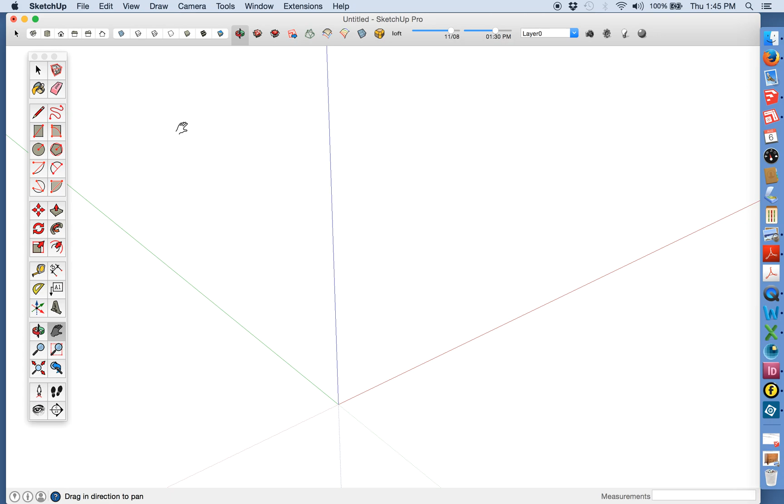Hello, my name's David Heim, and today I'm going to show you how to begin a SketchUp model by tracing over a photograph. It's a technique called photo match. I'm going to be using the image of this shaker blanket chest, and it's a good example of the kind of photo you need to make photo match work properly.

It's taken from roughly a 3/4 view, so you can see two sides. And it hasn't been cropped or resized in any way. If you work with something like an image from a magazine or a book, chances are it's cropped, and the vanishing points for the perspective probably won't work properly.

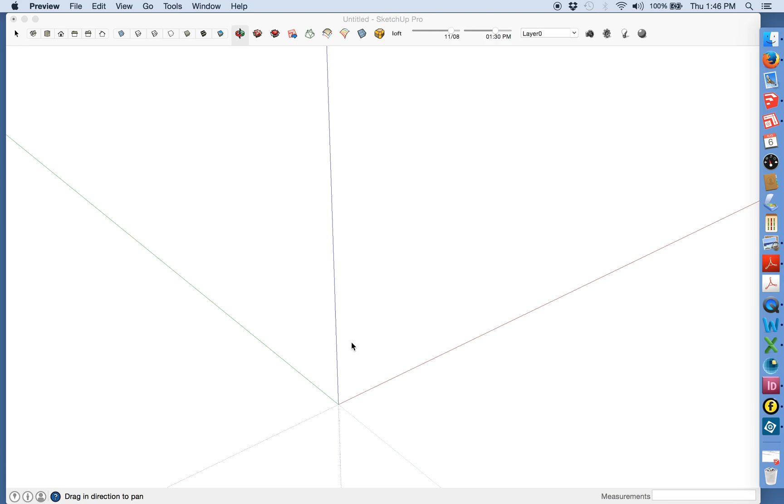So we've got a new SketchUp screen here, and the way to begin is by going to the File menu and Import. We'll choose the image we want, and down here make sure that you've chosen Use as New Matched Photo, not a texture, not an image. New Matched Photo, click Import.

And as you can see, that brings in the photograph along with a whole bunch of lines that can be very confusing at first. Most of them you can ignore. First thing you do, though, is take these dashed lines, grab them with your mouse or your trackpad, and just position them over very strong lines or edges in the photo. And here I'm making sure that I get the little red and green handles overlapping.

You can see that once you place one of these lines, all the other lines start to move. This is because what we're doing first is positioning the vanishing points for this perspective view. I'll just get one right across here at the top, and this is our final one. Get it over my little green line and then stretch it out along here.

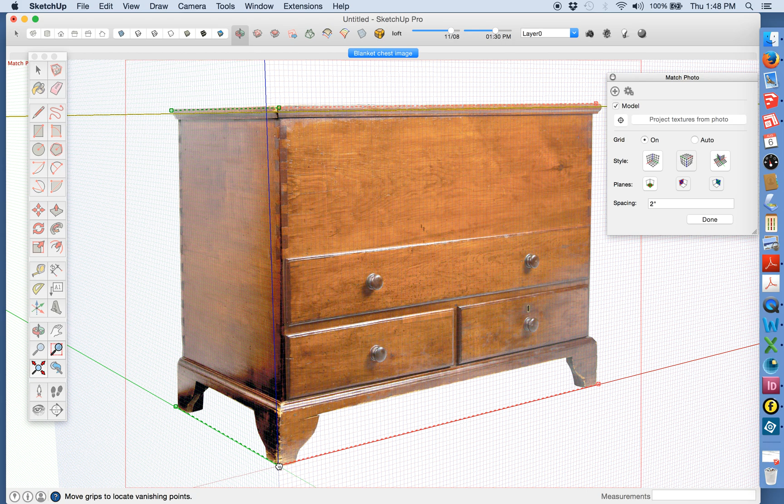Next, we position the axis lines, these red, green, and blue lines that are common in all SketchUp drawings. Get them right over that point that's closest to the camera, like so. And then I can click Done in this Match Photo window. We don't need it, so we'll get rid of it. And as you can see, we've got axis lines positioned along the edges of the photo, and SketchUp has created a scene for this particular image.

But of course I don't know what size it is, so the first thing I have to do is scale it. And I'm going to do that with the tape measure tool. The Match Photo feature gives you a grid that you can use, but it's kind of hard to use. This is a much simpler method. I just placed guidelines, as you can see, at the corners of the image.

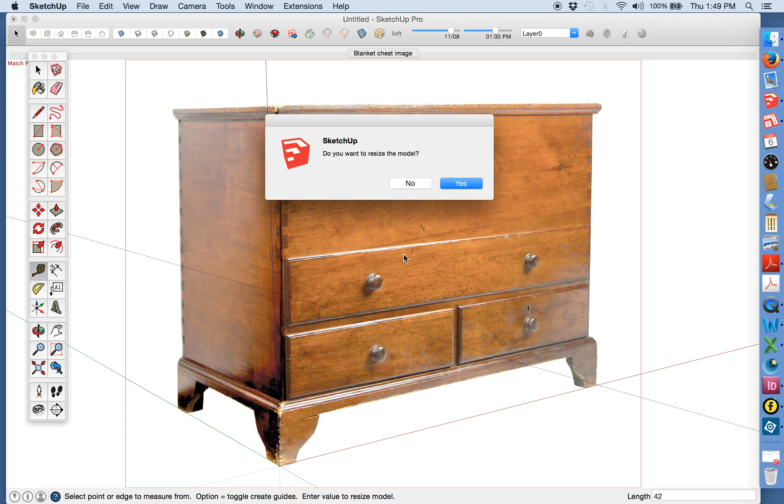And now I'm going to click the tape measure from one guideline to another while I hold down the Option key. It'd be the Control key on a PC. As soon as I'm at the second guideline, I type in the dimension that I want. I do happen to know it's 42 inches left to right. And then I hit Return. SketchUp asks if I want to resize the model, and I say yes. Now I'll hit that Scene tab, and there is our image.

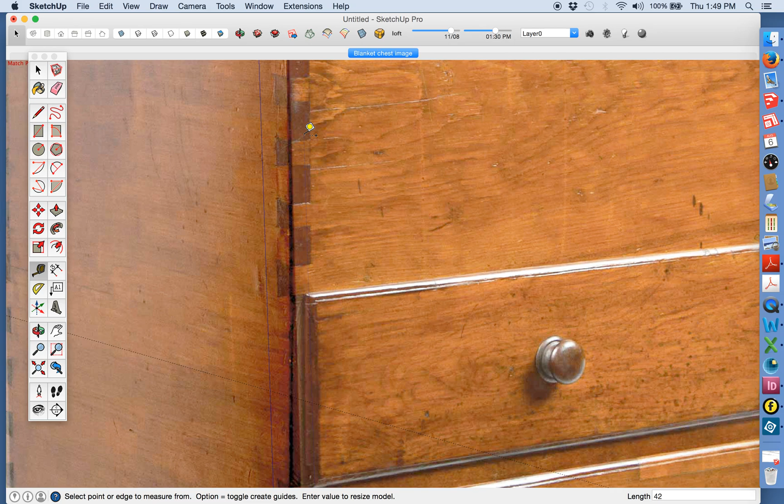You might ask, well, what if you don't know any of the dimensions in the photograph? You can take an educated guess. If you're doing a table, for instance, figure that the height is somewhere between 29 and 30 inches. If you don't know an overall dimension, you could take something like the ends of these dovetails, figure that the board is 3/4 of an inch thick, and do the scaling at that point. Whatever is going to work for you.

You can always change the sizes in SketchUp, and photo match, frankly, is not a very precise technique because of the problems that you might encounter with the photograph. But it's better than nothing. And what I'm doing now, I'm getting ready to trace over part of this image. I'm going to start with the base, and I'm only going to do half of the front.

That way I can copy and flip what I draw so that I get absolutely identical bracket feet left and right. I can also take the half that I draw, copy and rotate it, and use it for the side part of the base. That way I know I'll get bracket feet that are identical on all four corners. I'm also not going to worry about the molding here. You can add that later in SketchUp.

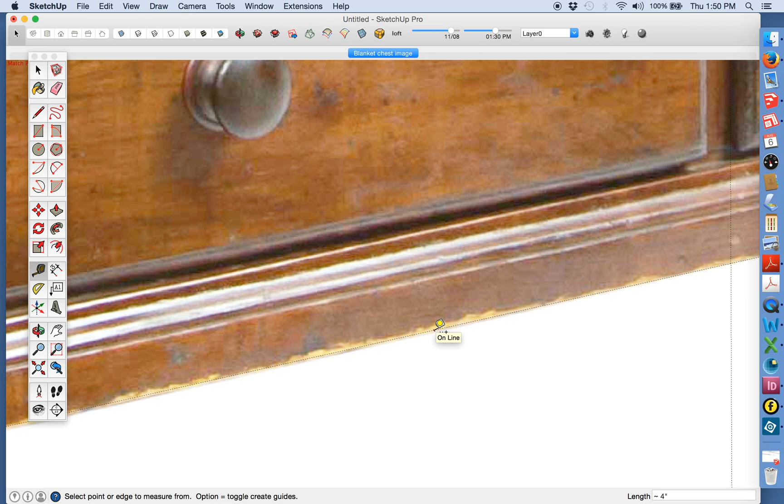So I'm just going to take the tape measure again, put in a guideline to mark the bottom edge there, and I'm taking a wild guess. I'm going to assume that the flat part of that base is 1 inch high. Placed another guideline there to mark that. Now I'm going to hit X-ray view. It'll just make things a little easier to see.

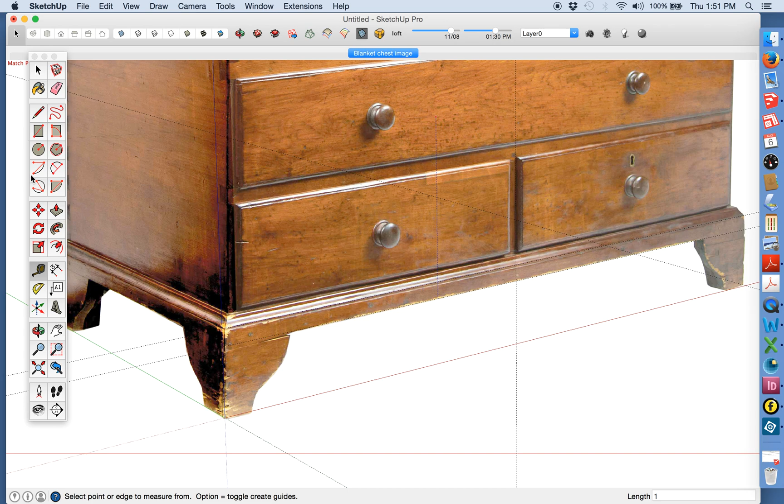And I'll take the rectangle tool, get it right down here where those 3 axis lines cross, and come right up here to my other guideline. I get a prompt that says intersection, tells me I'm in the right place. I've also changed the color of my line and made it heavier than normal, just so it's easier to see here laid over the photograph.

Now I can just take the line tool and trace over the guidelines, switch to the 2-point arc tool and try to put a curve that's as close as I can get to the curve I see in the photo. And let's try that again. That didn't take. There we go, that's better.

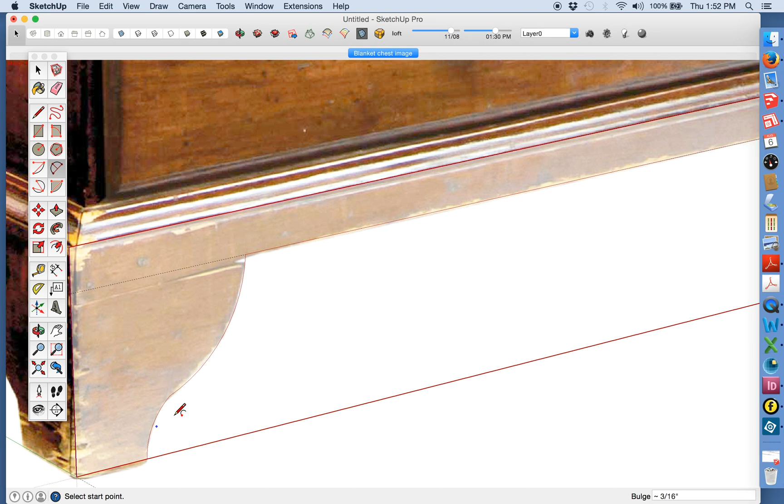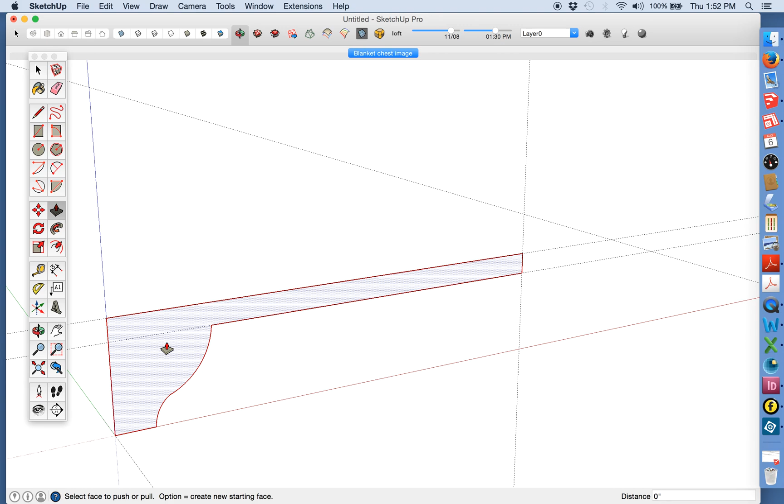Now I can erase the lines that I don't need. Just highlight them with my arrow tool. And there, if I orbit away a little bit, there you can see the shape that I've drawn. Don't worry, the photograph hasn't gone away, it's just in hiding. I can use my push-pull tool now to make this 7/8 of an inch thick. That's what I decided the thickness of the base should be.

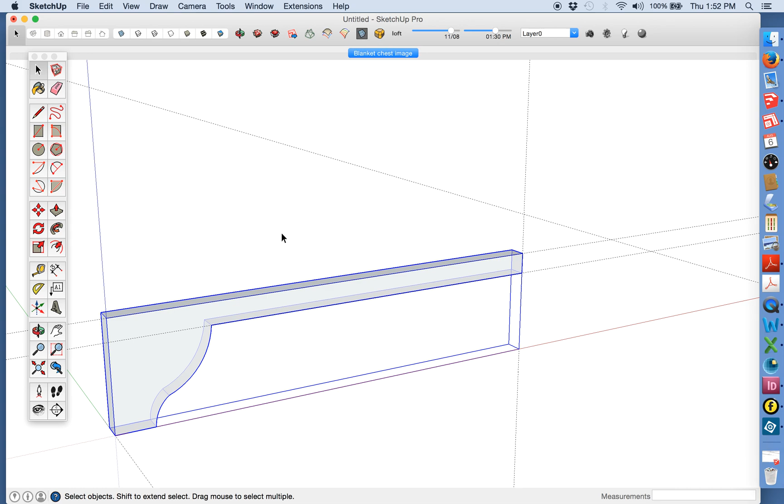And of course, before I go any further, I want to make this a component. That's rule 1 when you're working with SketchUp. You always work with components. Otherwise, you're just generating random lines and they'll always get in each other's way and you'll never get anywhere with SketchUp. I'll hit that Scene tab. And there you can see everything comes back into view.

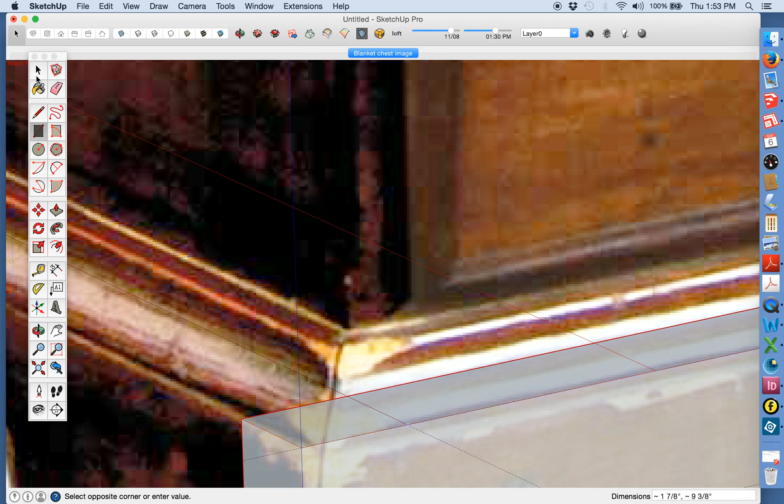I'm going to put in one more line down here on my base. Come in another 7/8 of an inch from the edge. And that will help me get the other parts positioned properly. Doesn't have to be part of the... There we go. And we'll just get everything back in view now.

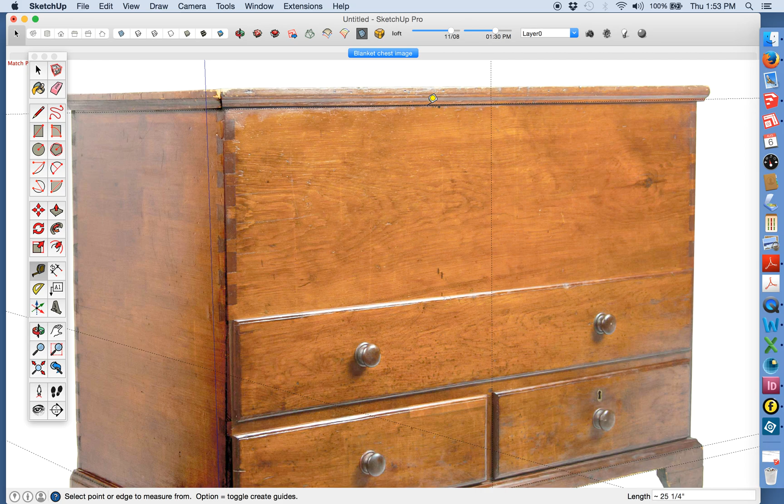Go back to my tape measure tool, work on the front. I'm going to get it right on that edge and come up here and put another guideline where the front seems to end and the top begins. And I'm going to just click on a corner here. Zoom up so you can see that better. Click on a corner right here and just come right up along that blue axis. That marks one edge of the front.

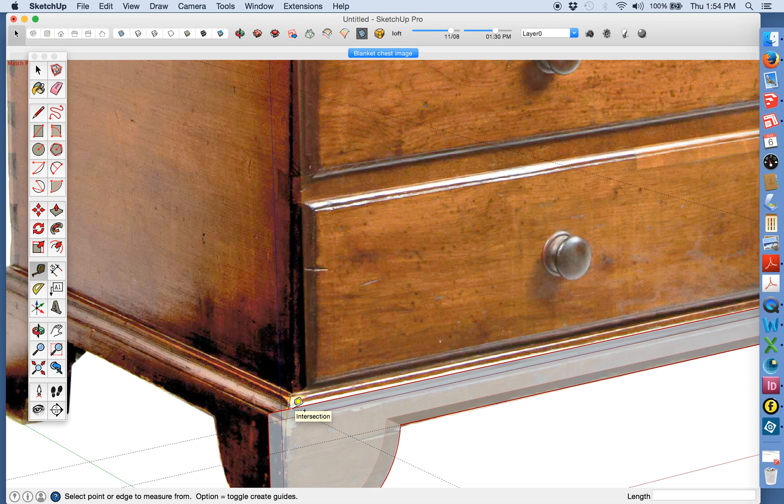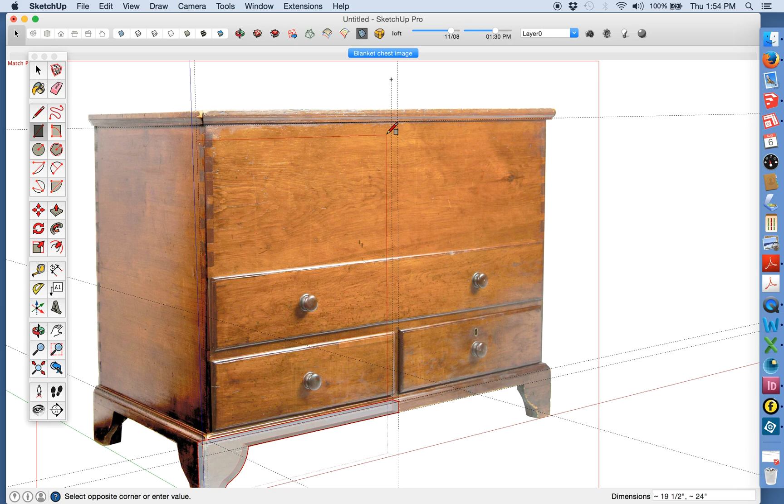I'll do the same thing over here. Again, I look for those prompts. Here it says intersection. That tells me I'm right where I want to be. I'm right up again like so. Now I can go back to my rectangle tool. This is a faster way of drawing a square. Come right back to that intersection and come back up here where my 2 guidelines cross.

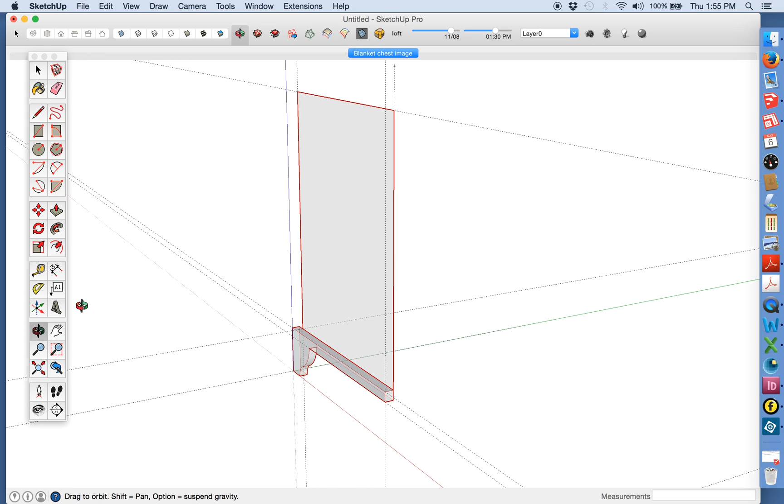Like so. And there you can see a shape for the front. I'm just orbiting around to make sure that it's in the right plane. Yeah, everything looks good. So I can make this 3/4 of an inch thick, and we'll make it a component as well. Now we'll go back to our standard view here.

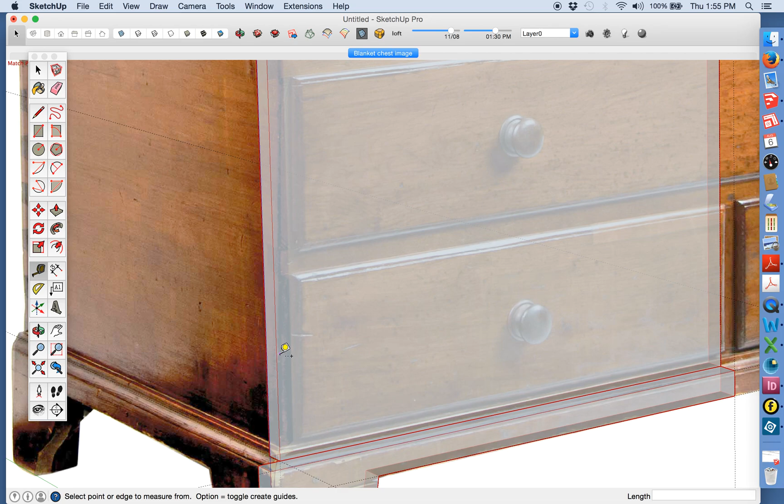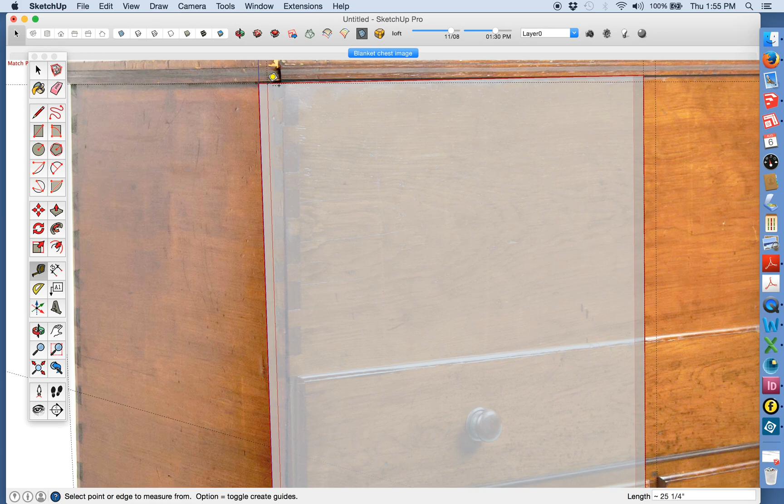Put in one more guideline, start from the front of my front, right on that edge, and come back this way and try to hit that corner like that. That'll mark the edge for the side piece. And I want to put in another guideline. Again, where the... I'm going to get it right there at the top of my front piece. Now it's a simple matter of drawing in yet one more rectangle.

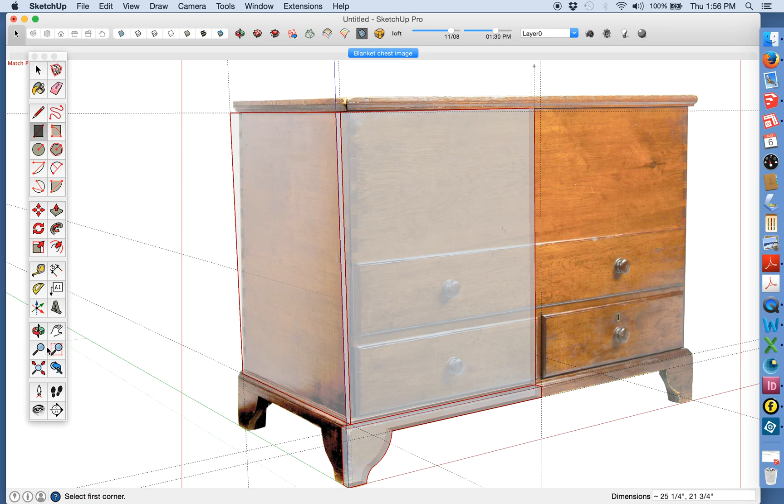Start over here. And we'll come up this way. Again, look for those prompts. When it says intersection, it means you're getting right at the point where two guidelines or two lines cross. And again, I want to orbit just to make sure I'm in the right plane. Yeah, that's looking good. So now I can make this 3/4 of an inch thick and make it a component as well. And we'll come back down like so.

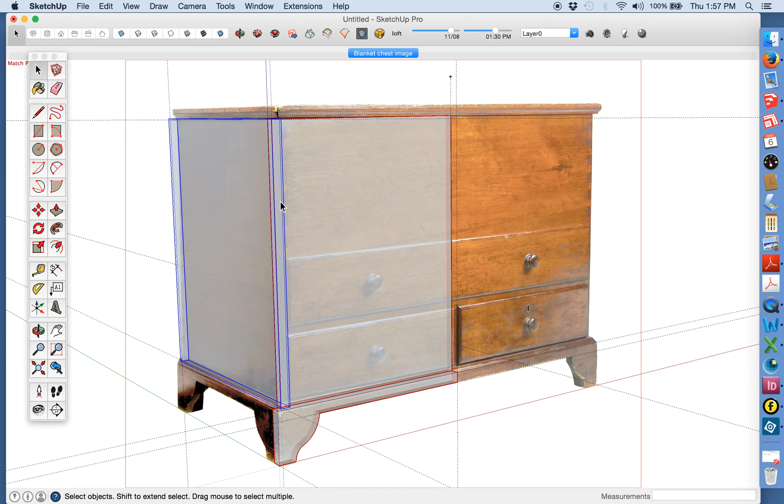Now I'm done with the drawing. I'm done with the photograph. The three parts that I've created here using Photo Match are all that I need to do at this point, because I can make everything else that I need for this blanket chest either as part of one of these components or in relation to one of these components.

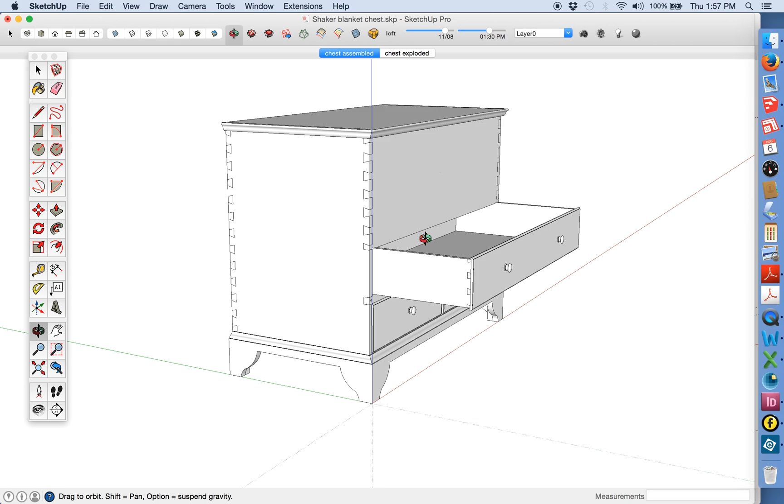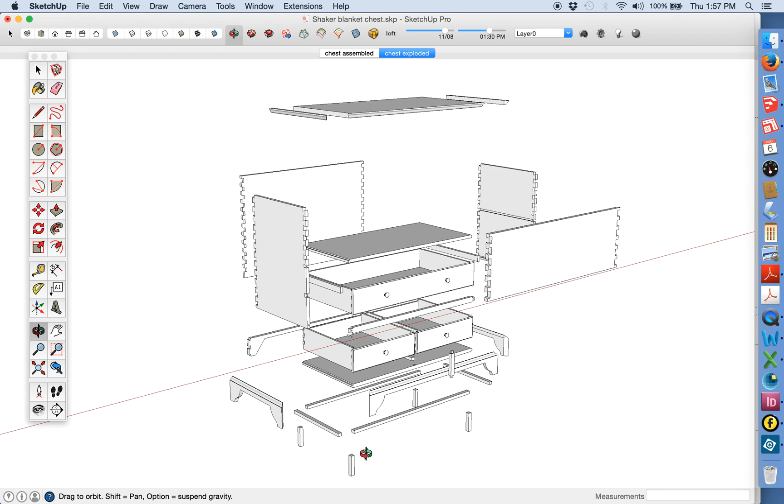And when I finish the model completely, it's going to look something like this. We've got everything in place. All the drawers are fully detailed. Dovetails on all four corners. And I've also created an exploded view. It's got all the parts, including parts like the drawer runners and the divider between the two drawers and so on. All the things that you can't see from the photo, I've put into the model. And again, as I say, it's all based on things that I can create in relation to those three shapes that I drew using Photo Match.

Give it a try. It can be a tricky technique to master, but once you do, I think you'll find it very useful, and I hope this helped.